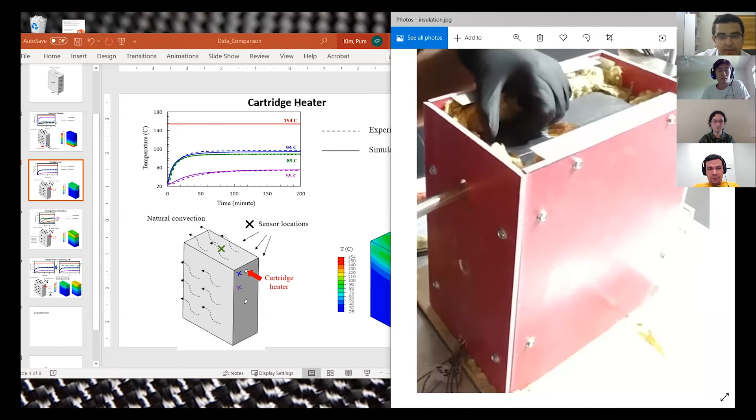So I'm wondering if you can see the screen right now. Can you guys see this screen? Yes, okay cool, we can see the screen. But there is a screen open right next to it. There you go. Yeah, right.

Yeah, that's right. So as you mentioned, Eric, we had an issue with the heat transfer from the bottom of the part to the top surface of the mold. So we initially insulated the sidewall, but the temperature increase or temperature gain by insulating was not that high.

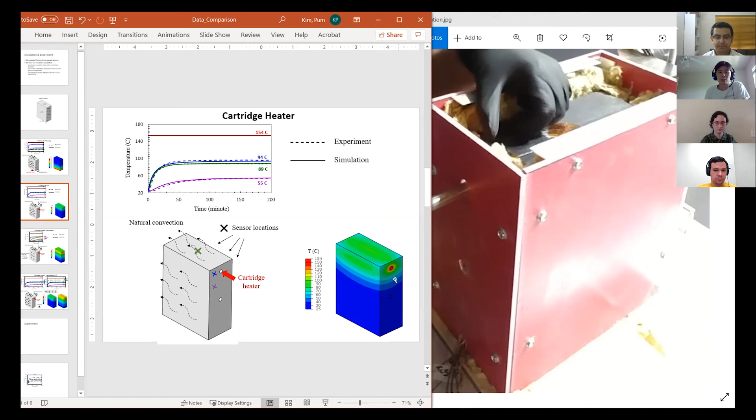So we tried another method, which is we put a cartridge heater inside, and then apply heat through the cartridge heater. It's electricity heating through the cartridge heater, and we had some good temperature increase in the surface of the mold. So insulating did not really help much, but we found that cartridge heating helped a lot.

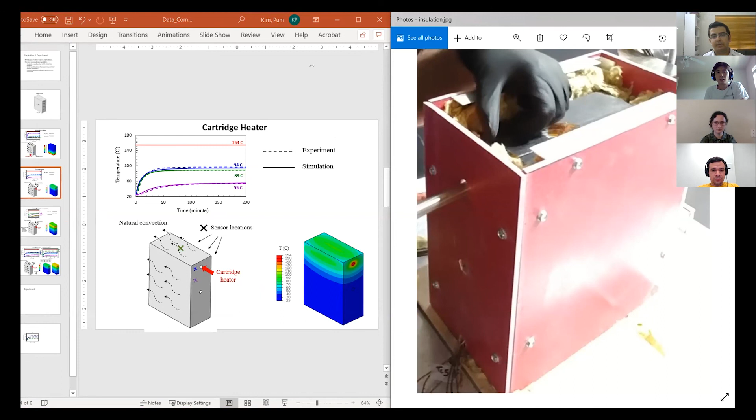Do you think you could print in air passages, like in the wind blade mold, and then add a supplemental hot air heater to improve the thermal performance?

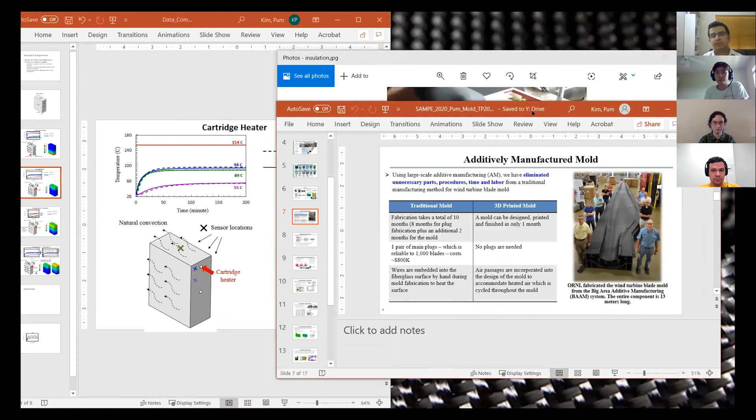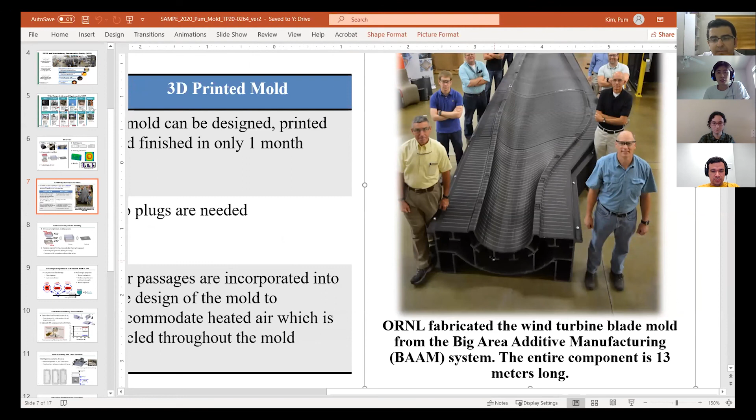That's again a very good question. So if I show this one, we have printed a mold with hot air passages, as you can see in this picture.

At this time, it was not a compression mold, so there is not much pressure from the top of the mold, so it was possible to print air passages. For this application, though, it's compression molding, so we will have a lot of pressure from the top surface of the mold. So printing with an air passage, which is basically a big void inside the mold, may not be a good solution due to deformation issues.

So that's the answer. But to increase the temperature of the mold, we are currently trying other methods to heat the surface of the mold instead of making an air passage inside the mold.

So your question is very good, applied to other types of composite molds instead of compression mold. Does that answer your question? I believe so. Yes, thank you. Thank you.

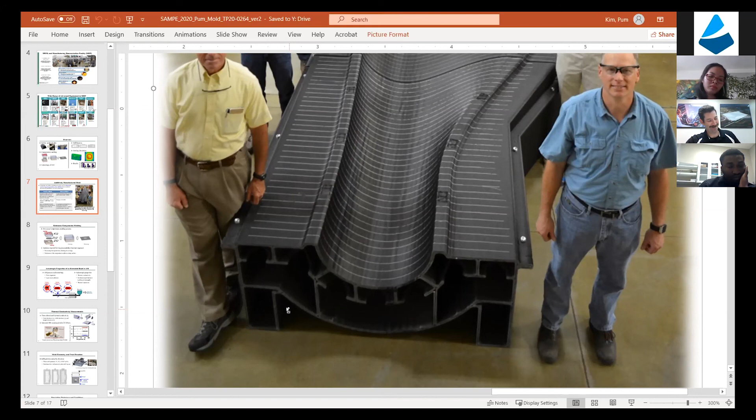All right. Dr. Barocio, in your work, design of composite compression molding tools, is it possible to simulate the durability of this tool? Do you have any ideas as to what its lifetime might be?

Yeah, thank you, Eric, for the question. It's a really good question. So I would like to first clarify the purpose of the printed tools. We are using those mostly as prototyping tools, so you can do basically a short production run or a handful of parts with the printed tool.

And going to the question, in terms of the simulation capabilities, we are able to predict creep deformation. So basically when we apply pressure and temperature, the fiber reinforced polymers will have a tendency to creep out, and there will result dimensional changes of the part.

So in terms of durability, if we define durability in terms of dimensional accuracy, we can estimate the shape change of the tool. But there are other aspects of durability, like the surface characteristics of the printed mold, that at this stage we are not able to capture.